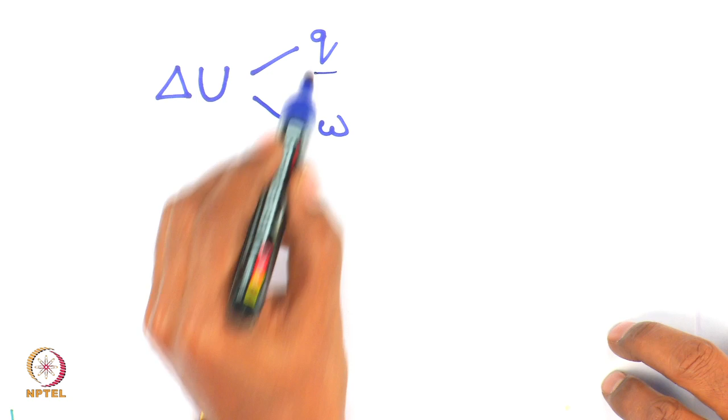It is like taking an example of, let us say, if we consider Q and W as 500 rupees currency note or 1000 rupees currency note, and we go to a bank and deposit, the statement that we get is the total amount deposited in the bank, irrespective of whether you have deposited 500 rupees notes or 1000 rupees notes or 2000 rupees notes. So, in the same way, the system is blind to whether the energy is flowing in the form of heat or work, but it is leading to change in internal energy of the system.

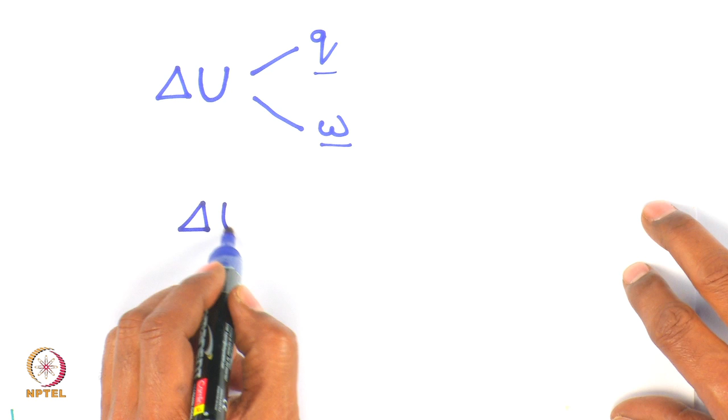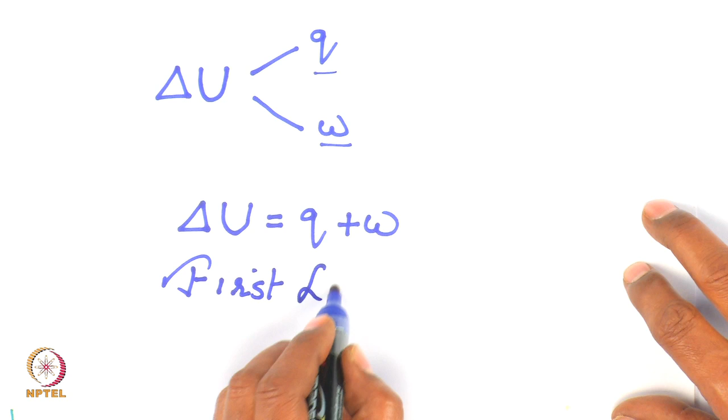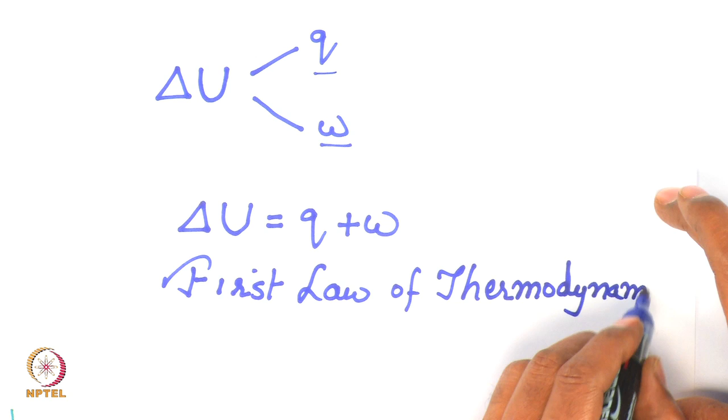So, if I write in a formal way, delta U is equal to Q plus W. This is the formal statement of the first law of thermodynamics. This is a mathematical statement of the first law of thermodynamics. And as we will see, this is a very useful mathematical equation.

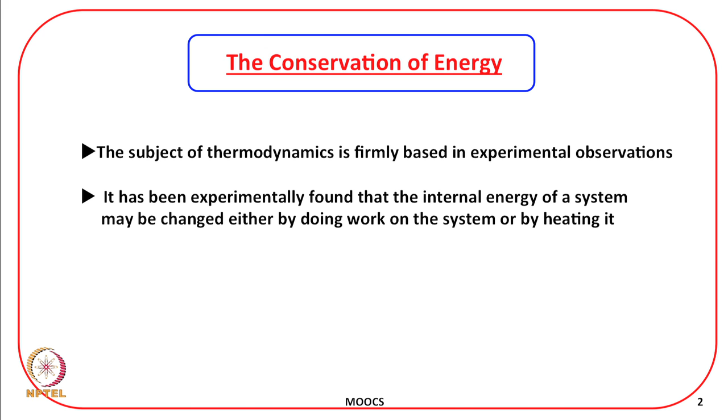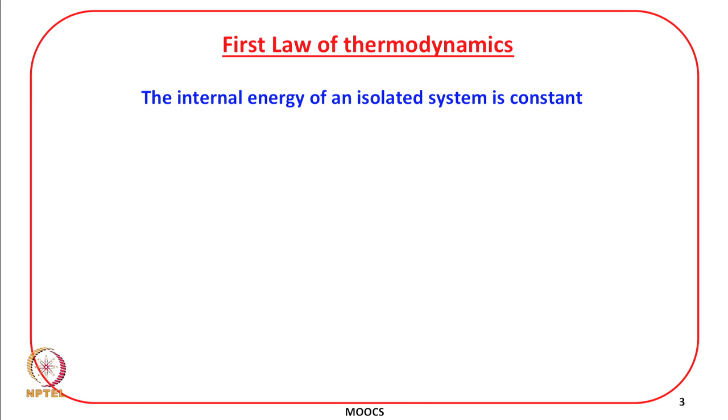And then, as we discussed in the previous lecture, we can express the internal energy changes as well as the heat in the form of work. And that is what I mentioned, that work is the most fundamental quantity in thermodynamics. And today I will demonstrate that we can express the change in internal energy exclusively in terms of work and the heat also in terms of work.

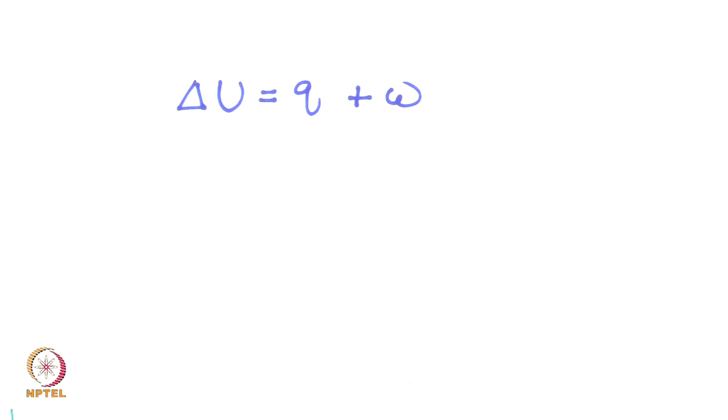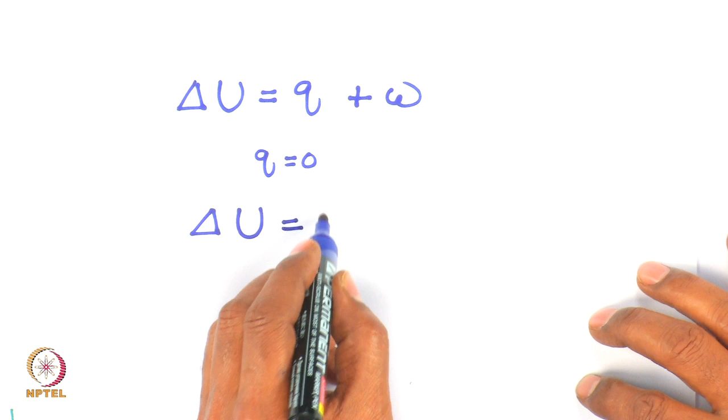So, the equation that we just derived is delta U is equal to Q plus W. And let me consider a process which is adiabatic. Adiabatic process means Q is equal to 0. So, I will write now delta U is equal to W adiabatic.

Remember that we have discussed that work is a path function, but see what we are doing here is we are connecting a path function with a property which is a state function. A path function is becoming equal to the difference in a property which is a state function. That means, according to this equation, the work done in changing a system from one specified state to another specified state under adiabatic condition is going to be the same irrespective of how the work is done.

Let us take an example. Let us say I take 5 kg of water and we need to change the temperature of water by some amount. And if we keep adiabatic conditions, then the work required to change this temperature will be the same whether this work is done in a mechanical form, that is by stirring it with the paddles, or by passing an electric current. The same amount of work will be required.

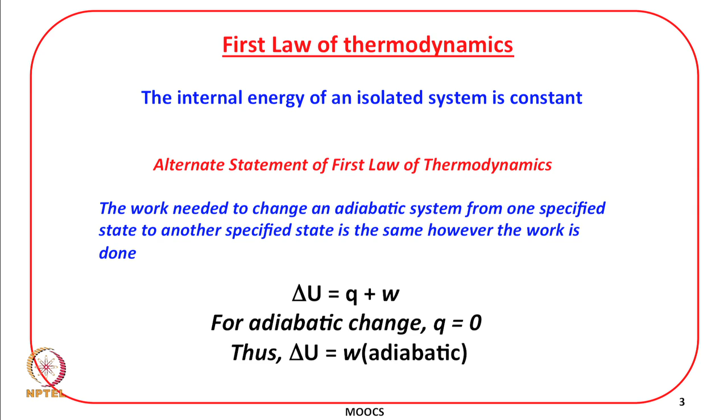You remember that earlier I discussed that work is said to be done in a process if that process can lead to change in height of a weight somewhere in the surrounding. So, that we can actually see with our eyes. Now, after having demonstrated this connection between delta U and W, I will demonstrate that we can also express heat exclusively in terms of work.

Here we have taken an example of an insulated system, that is, one which does not allow the transfer of heat, as forming the adiabatic process. Now, let us assume that we just remove the insulation, and once we remove the insulation, if the work is done on the system, then some of that work energy can leave the system in some form of energy, and we usually call that energy heat.

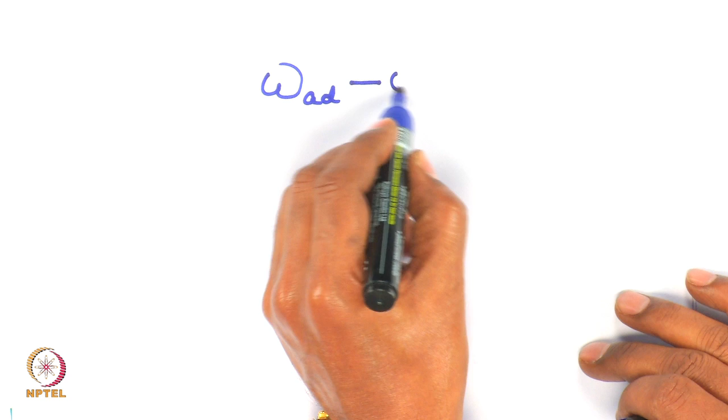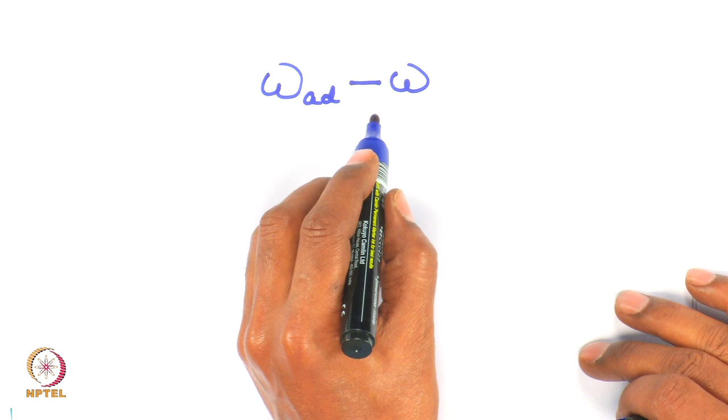So, therefore, earlier we had work under adiabatic conditions, and now if we remove the insulation, let us say the new work is W. To get the same change, this difference in the work is equal to the energy that has left the system, and that energy is heat.

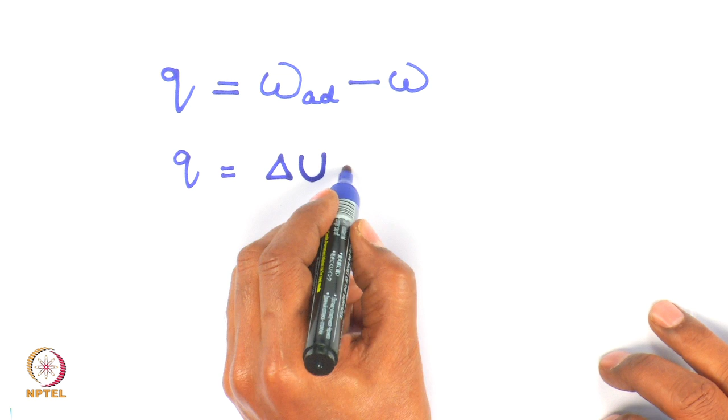Because now the system is not adiabatic, insulation is not there, therefore some amount of the work done on the system can actually leave the system in the form of some form of energy which is called heat. So, if the initial and final states are same, then this difference in the work done is equal to heat, and from the previous discussion, W adiabatic, we just discussed, is equal to delta U, and if I rearrange this I get the first law of thermodynamics back from an alternate discussion.

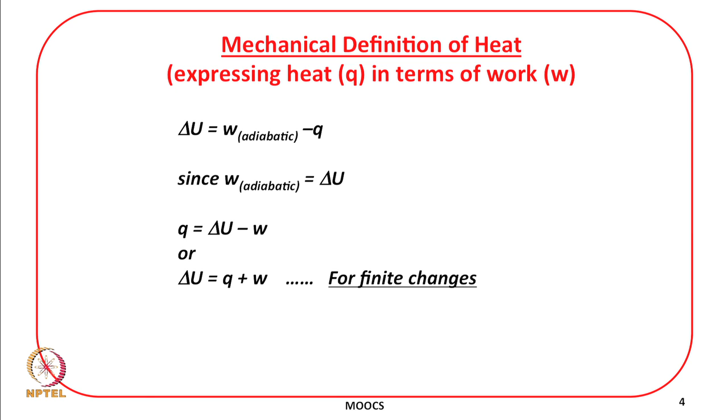Now, let us take a look at this slide. The delta U will be W adiabatic minus Q, and since W adiabatic is equal to delta U, therefore Q is equal to delta U minus W, or delta U is equal to Q plus W. This is what I just described, and this is for a finite change.

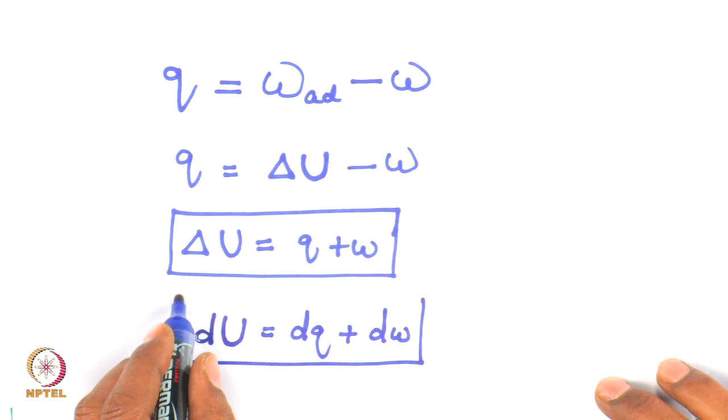Delta U is equal to Q plus W is for finite change, and for infinitesimally small changes I can simply write dU is equal to dq plus dw, and this is another equation which will be very useful when we deal with the infinitesimally small changes and then derive several other equations.

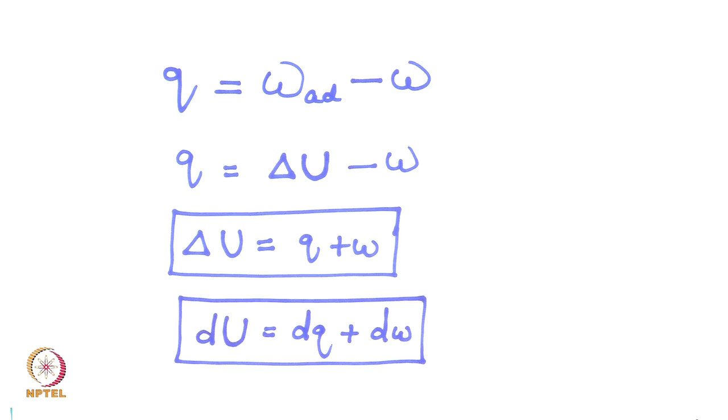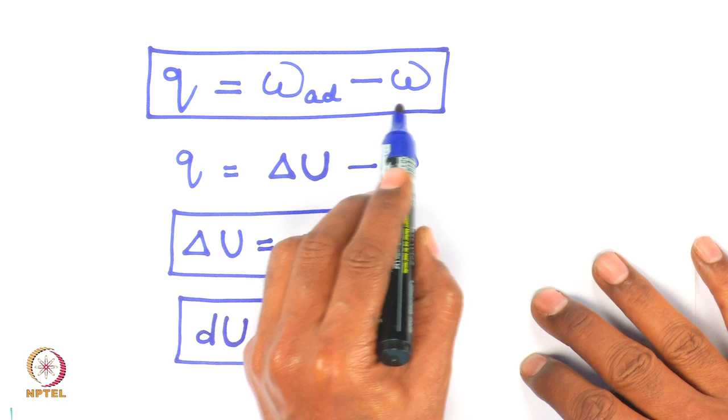But the point to recognize here is this equation, that we have demonstrated that we can express heat exclusively in terms of work. So, therefore, once again I re-emphasize that work is the most fundamental quantity. Both the internal energy, changes in internal energy, and heat can be expressed in terms of work.

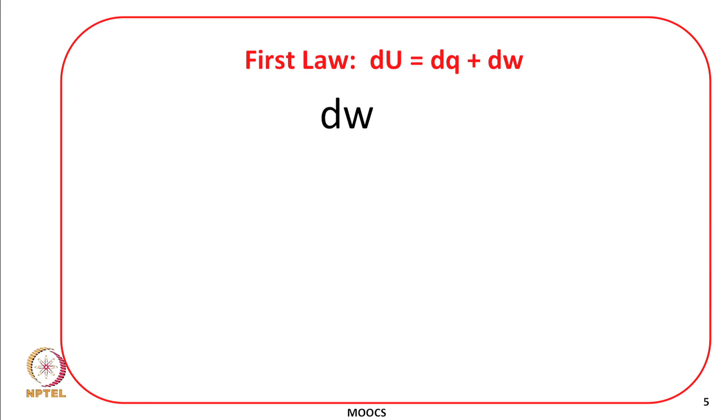Let us recall now the first law, dU is equal to dq plus dw, where dw represents the work done. The work done can be of two types. First one is the non pressure volume work, which in some books you will see they write as extra work. And the second type of work is the work of expansion, which is also called the pressure volume work.

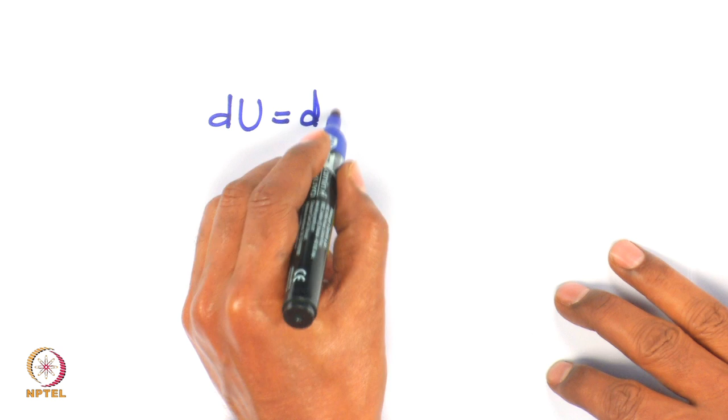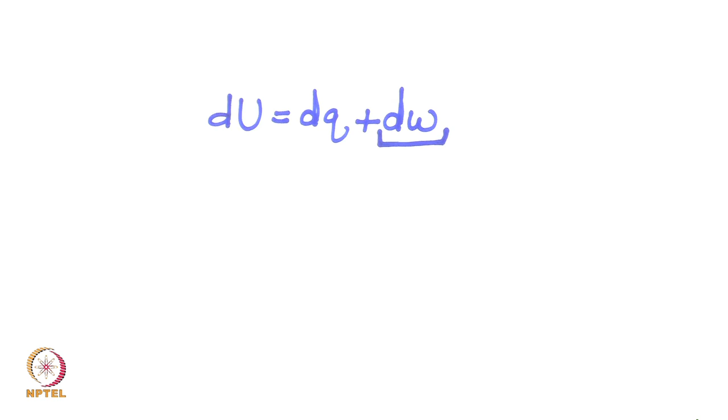Okay. Now, suppose we do not allow the system to do any extra work, if no non pressure volume work is done, and if the volume is held constant, that means there will be no pressure volume work done either. What I am trying to say is that we have dU is equal to dq plus dw, and if we do not draw any work from the system, that is, the system is not allowed to do any non pressure volume work or pressure volume work. Pressure volume work will be 0 when the volume is held constant,

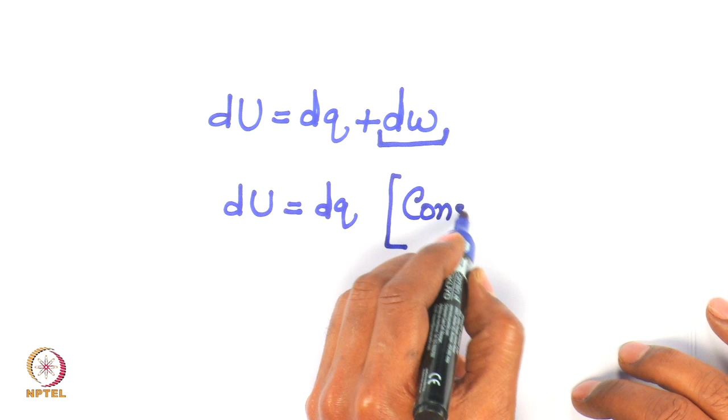and if there is also no extra work, then dU will become equal to dq, and what are the constraints? The constraints are constant volume, and the other is no extra work.

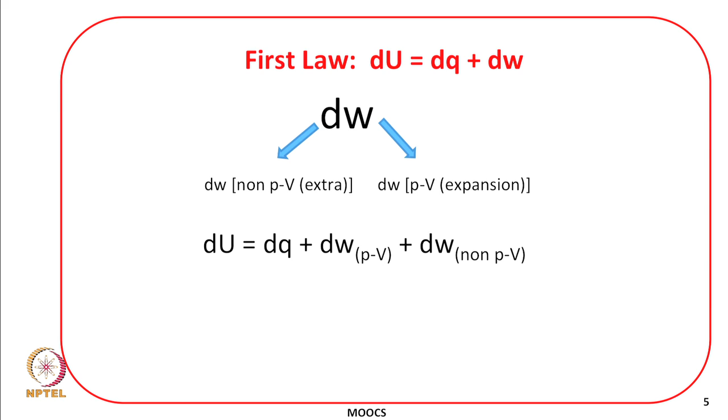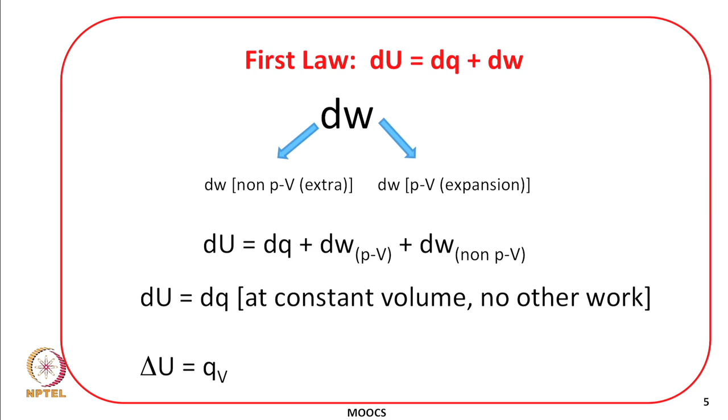So, let us now take a look at the slides. dU is equal to dq plus dw; as I mentioned before, it is pressure volume work or non pressure volume work, and in case there is no work done, whether of pressure volume or non pressure volume type, then dU is equal to dq. And for a finite change, what you need to do is just integrate, and you have delta U is equal to q_v.

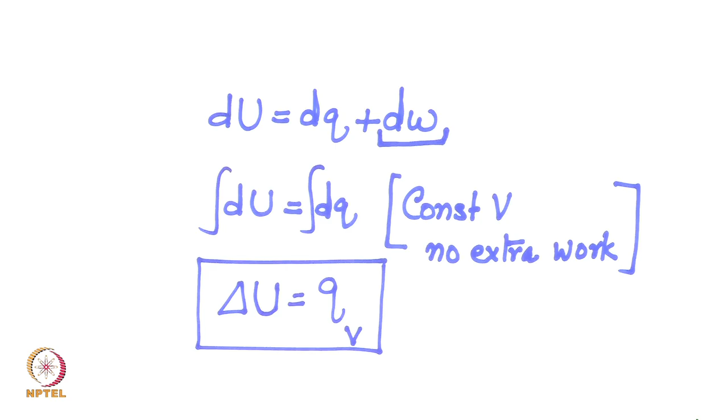The heat supplied to a system at constant volume is equal to change in its internal energy. So, experimentally, if we want to determine the change in internal energy, one way of finding it out is by measuring the heat supplied to the system, provided the volume is kept constant.

Now, let us discuss enthalpy. Suppose the volume is not held constant; you allow the system to expand or compress, let us say expansion. We can consider pressure constant, but let the volume change. Now, the amount of heat supplied is no more equal to change in its internal energy; it is a different quantity now, because some of the heat supplied can be used to drive back the surroundings.

And we will see here that if the pressure is held constant, then the amount of heat supplied turns out to be equal to change in enthalpy. Let us see how it comes.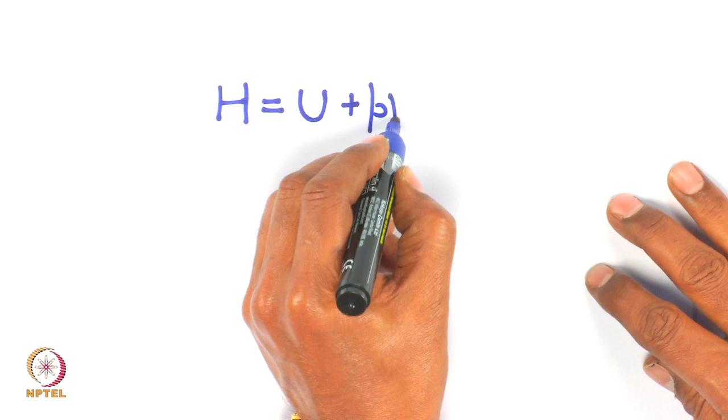How do we define enthalpy? It is a very common question asked in several interviews, and sometimes there is a confusion in the definition of enthalpy, and let us get rid of that confusion. Enthalpy, how do you define enthalpy? The definition of enthalpy is H is equal to U plus PV, where U is internal energy of the system, P is pressure of the system, and V is the volume of the system.

The confusion sometimes can come because of this PV term, because PV is equal to nRT is generally used for ideal gases. But remember here that this PV is a part of the definition. This definition applies to all the systems, irrespective of what is the state of the system. So, not to be confused with the ideal gases. The definition of enthalpy is H is equal to U plus PV.

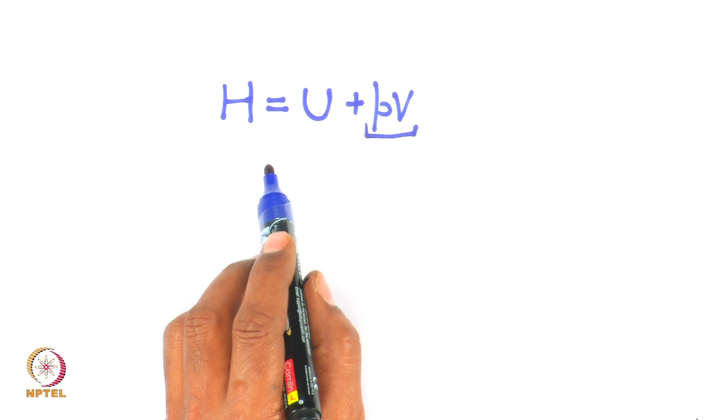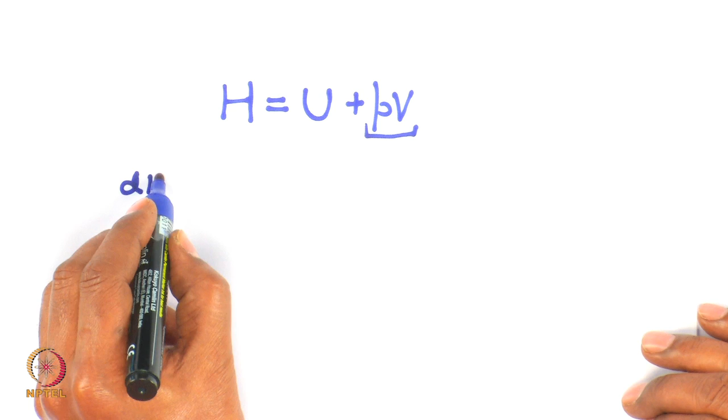All right. Now, let us say there is some advancement of the process. The change dH is going to be equal to dU plus PdV plus VdP. So, dH is equal to dU, which by first law is equal to dq plus dw. This comes from dU, then plus PdV plus VdP.

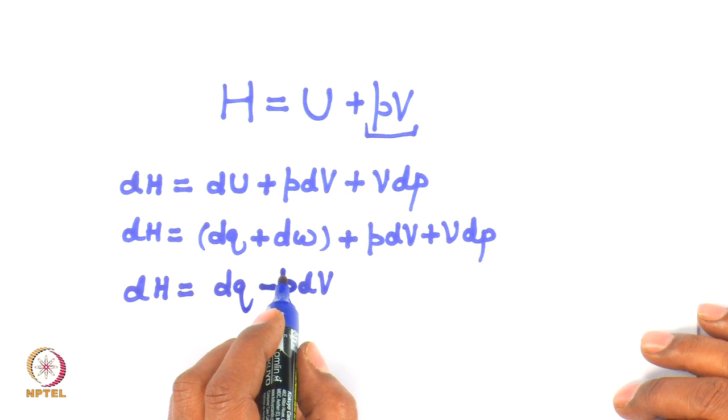Now, let us consider mechanical equilibrium between system and surrounding. If there is a mechanical equilibrium between system and surrounding, I can write dw as minus PdV, as we discussed in the previous lecture, that dw is equal to minus PdV in case there is a mechanical equilibrium between the system and surrounding, and also there is no other work done, that is non-pressure-volume work also is equal to 0.

So, in that case this equation becomes of this form, this and this cancel, and if pressure is held fixed, then dH becomes equal to dq at constant pressure, and also the condition is that there is no extra work or other work or whatever way you want to call it. And that is what is seen in the slide, that dH is equal to dq at constant pressure, no additional work. And for a finite change, when you integrate it, delta H is equal to Qp.

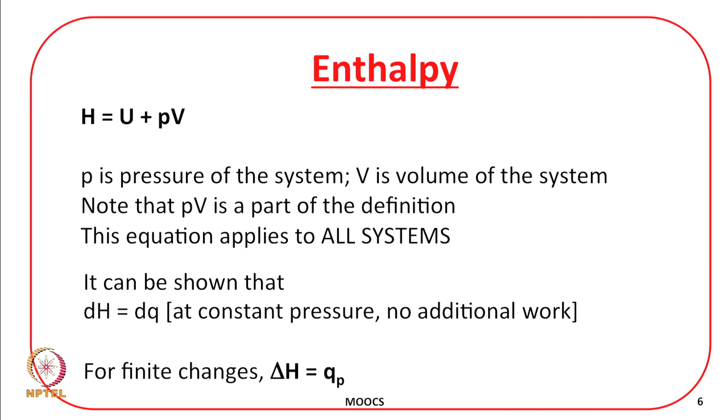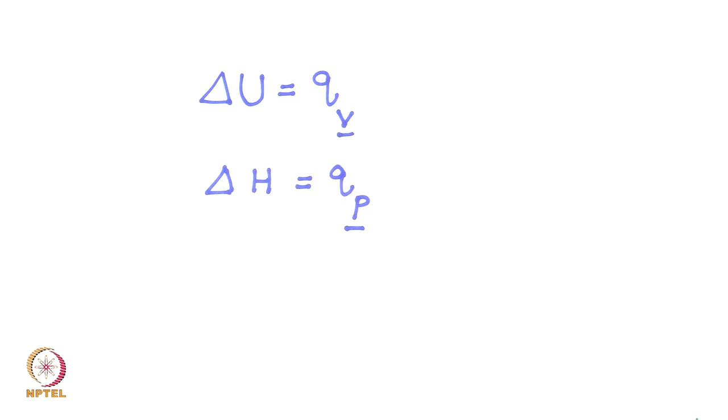Okay. So, the things to remember are that if we are interested in measuring delta U, this will be equal to qv, and delta H, this will be equal to qp. Here the volume is held constant, here the pressure is held constant, and in both the cases there is no additional work done. And later on we will discuss how to experimentally determine what kind of calorimeters are required to measure the values of delta U and the values of delta H.

Now we will discuss another very important thermodynamic quantity, and it is called the heat capacity. What is heat capacity? The definition of heat capacity is the amount of heat required to change the temperature of a system by 1 Kelvin. And obviously, if the temperature of the system is to be changed, it will definitely depend upon the conditions, that is whether the pressure is held constant or the volume is held constant. So, therefore, we will discuss two types of heat capacities.

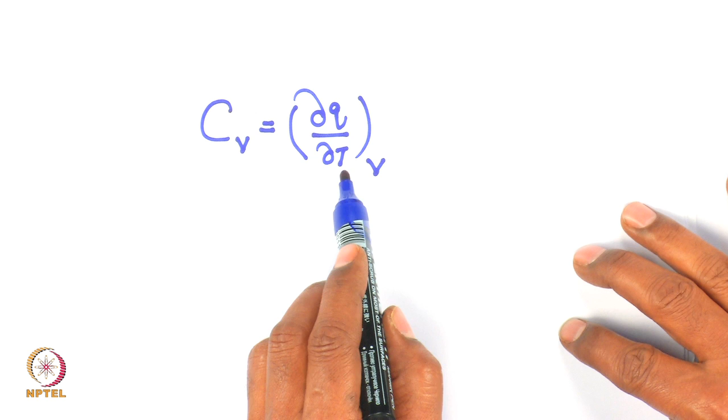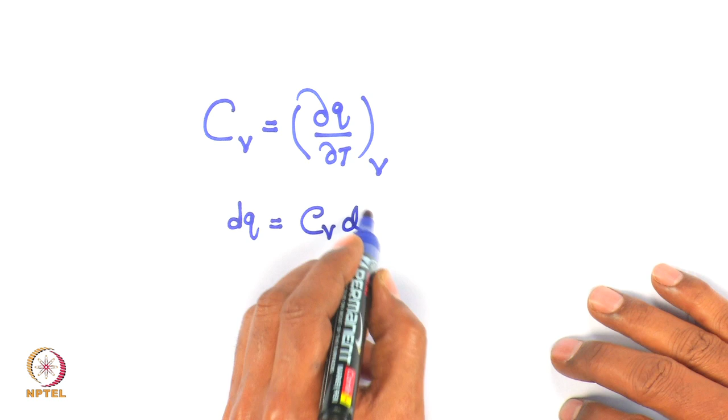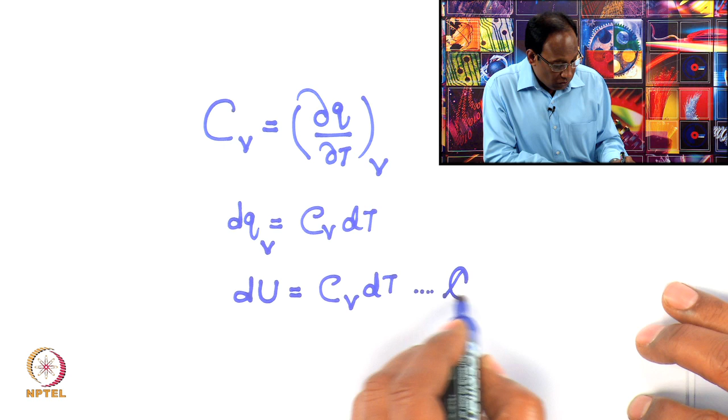One is the heat capacity at constant volume. The heat capacity at constant volume Cv is defined as the partial derivative ∂q/∂T at constant volume. The amount of heat required to change the temperature of a system by unit at constant volume. And from this equation, I can write that dq is equal to Cv dT at constant volume, and we have just shown that dq at constant volume is equal to dU is equal to Cv dT, and what is the constraint? You have constant volume.

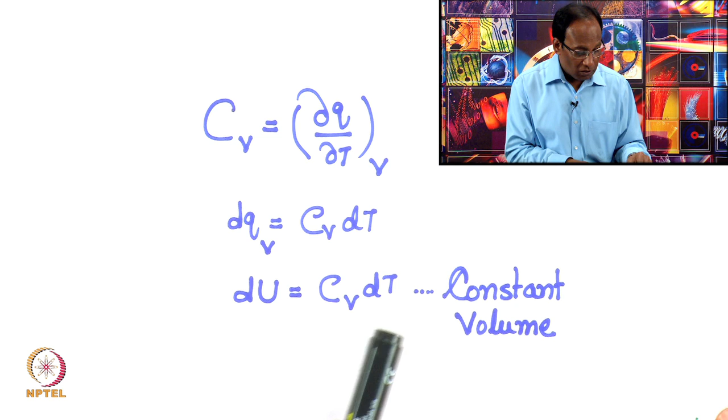If the volume is held constant and the temperature is changed, we can straight away use this equation dU is equal to Cv dT. However, as we will show later on, for a perfect gas, for an ideal gas, this equation always applies irrespective of whether the volume is held constant or not. That we will discuss later.

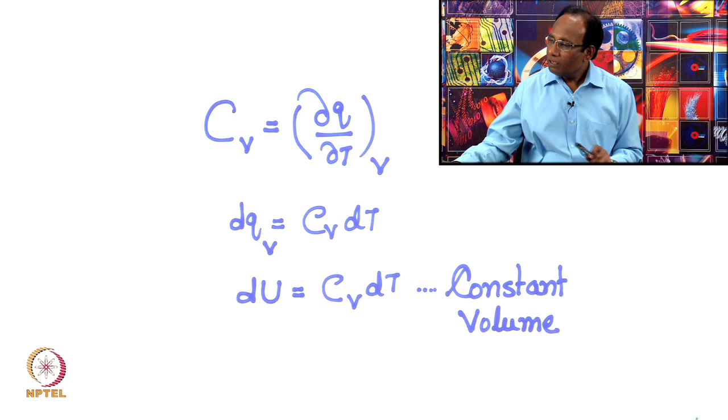Let us take a look at the slide. The heat capacity at constant volume is defined as Cv is equal to ∂U/∂T at constant volume, because dq at constant volume is equal to dU. Therefore, ∂q/∂T at constant volume becomes dU/dT, or ∂U/∂T at constant volume.

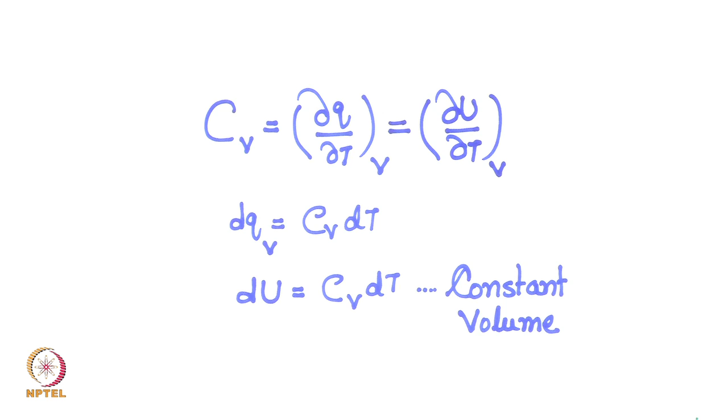Note that heat capacity, by definition, is a partial derivative. It is a partial derivative because one of the variables you are keeping constant, that is, volume is held constant. Heat capacity is an extensive property because the amount of heat required to change the temperature by unit degree will depend upon the size. However, if you calculate per mole, the molar heat capacity will become an intensive property because you will be defining it as per mole.

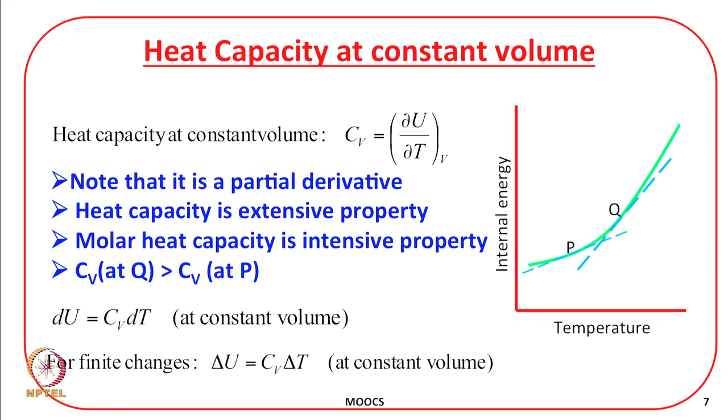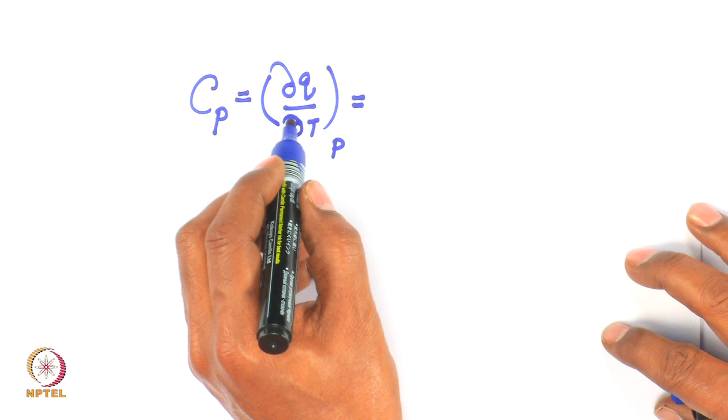Now, let us discuss the heat capacity at constant pressure. If the pressure is held constant, then definitely the amount of heat required to change the temperature by 1 degree will be different. And how do we define it? Cp, the heat capacity at constant pressure, is equal to ∂q/∂T at constant pressure, and since we just discussed that the heat at constant pressure is equal to the change in enthalpy, I will write this as ∂H/∂T at constant pressure.

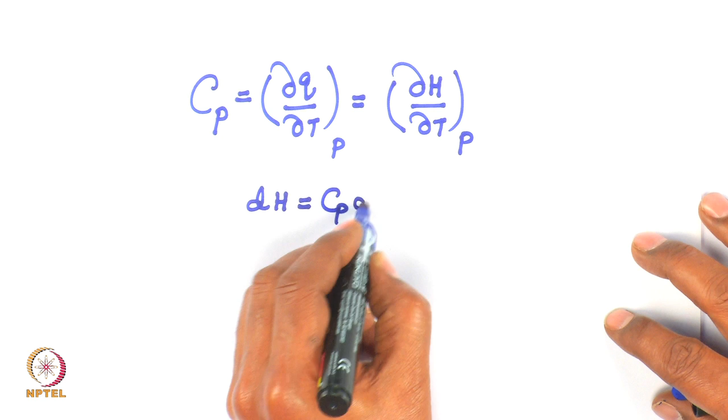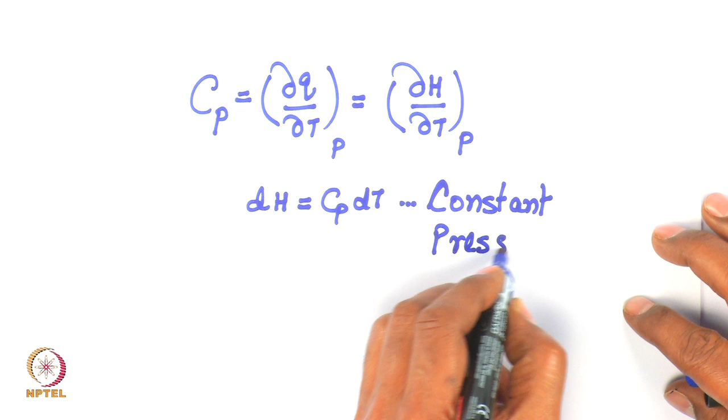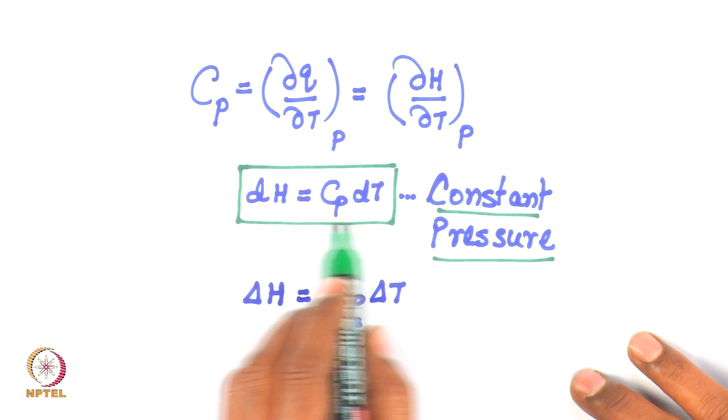Writing this in another form, dH is equal to Cp dT, again at constant pressure. And for a finite change, delta H is equal to Cp times delta T if Cp does not depend upon temperature; otherwise the temperature dependence has to be accounted for, which we will discuss later. So, here again this equation dH equals Cp dT at constant pressure is always applicable as long as you hold the pressure constant. However, we will demonstrate later that for a perfect gas this always holds true. You do not have to hold the pressure constant; this equation can be straight away used for a perfect gas.

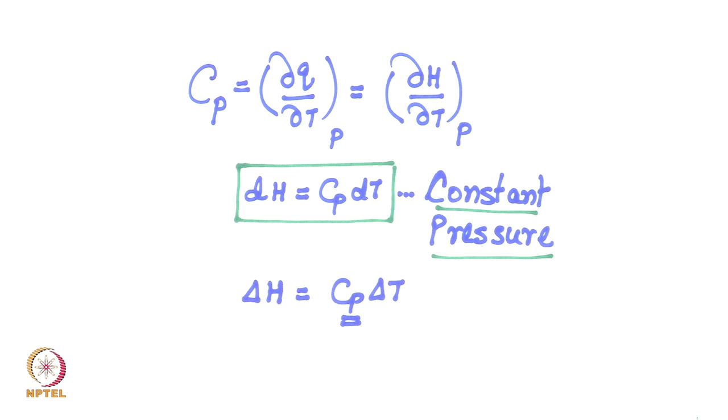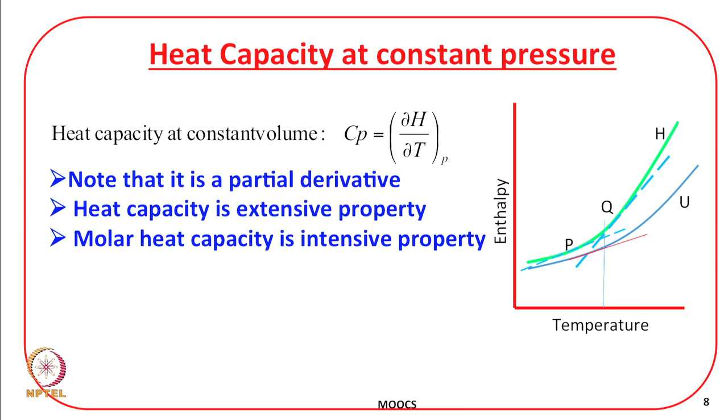Here again please note that it is a partial derivative, heat capacity is an extensive property, molar heat capacity is an intensive property, and the final point to note is that Cp is greater than Cv, because you can see at point P or point Q in the figure, the slopes are different, and the slope of the plot of H versus T is higher than the slope of U versus T. Therefore, Cp,m is greater than Cv,m.

What are the advantages of Cp and Cv? There are many applications of Cp and Cv. Let me first discuss the temperature dependence of reaction enthalpies. It is a very useful thermodynamic quantity which allows connecting one thermodynamic property to another at a different temperature without doing additional experiments.

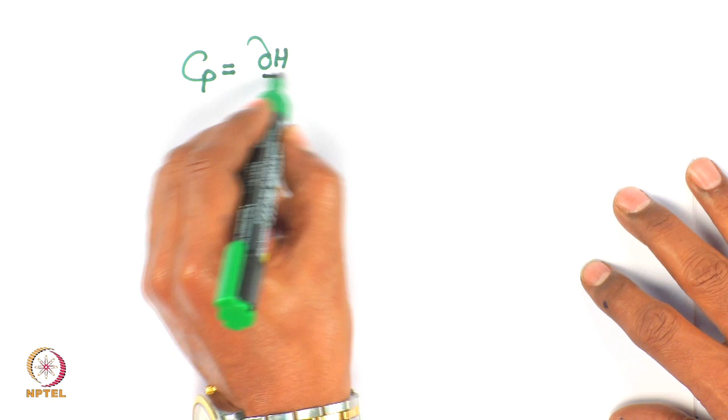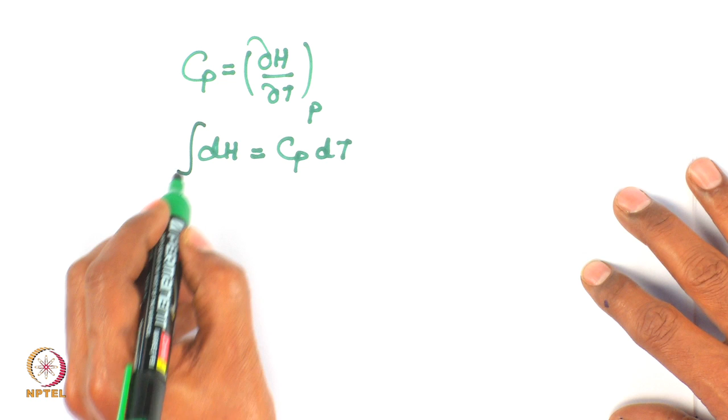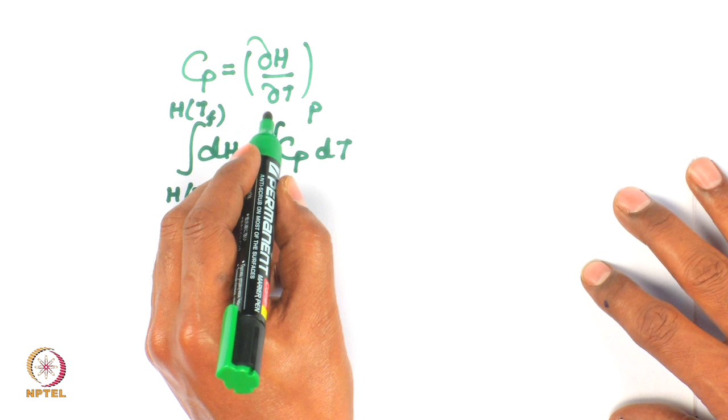So, look at this definition: Cp is equal to ∂H/∂T at constant pressure. So, dH is equal to Cp dT, assuming the pressure is constant. So, this is H at Ti, and let us say the final limit is H at Tf, integrating from Ti to Tf. So, H at Tf is equal to H at Ti plus the integral from Ti to Tf of Cp dT.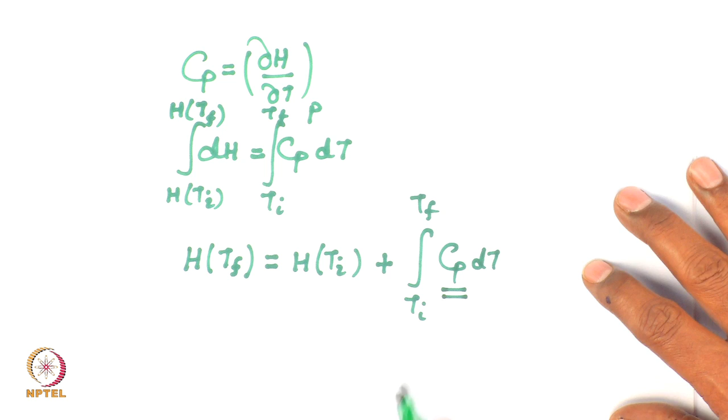Now, depending upon whether the heat capacity at constant pressure is temperature dependent or not, it can either be taken out of the integral or the appropriate expression can be used. Usually, Cp for a very narrow range of temperature can be considered temperature independent, and very safely and accurately so for an ideal gas. For a small range of temperature, Cp usually does not depend upon temperature, and in that case it can be taken out of the integral. In any case, if the temperature range is small, then to a fairly good level of accuracy, heat capacities can be considered independent of temperature. Otherwise, an appropriate equation should be used. Let us take a look at the slide.

In case the heat capacity is not independent of temperature, then a convenient expression, it is again an experimental observation, is that molar heat capacity Cpm usually varies with temperature according to A plus B T plus C by T square, where A, B and C are empirical constants.

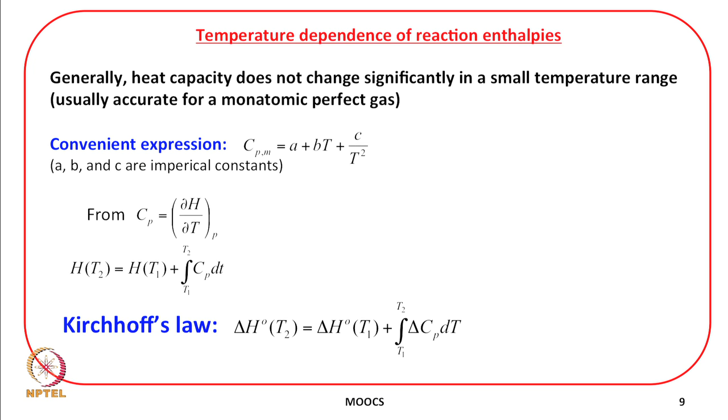So, finally, as I said, Cp and Cv are very important thermodynamic quantities. How do we generally interpret heat capacity? The general definition is the amount of heat required to change the temperature by 1 Kelvin. And if we think a little bit deeper, the amount of heat required to change the temperature of a system will definitely depend upon the type of system. It will depend upon the structural rigidity of the system, because if the system is very rigid, if there is a very strong bonding in a particular substance, then to raise the temperature by 1 Kelvin, a lot of heat will be required. So, I can write in general that Cp of a rigid system will be higher than the Cp of a soft system.

In the design of materials, for example, Cp or Cv, which is defined as dou Q by dou T at constant pressure. If upon supplying the heat, the change in temperature is very little, then the heat capacity is very high. If what we want is some material which should not respond to heat supplied to it in terms of large changes in temperature, then you want a high heat capacity material. That is, in that case, the heat supplied will not lead to reasonable changes in temperature.

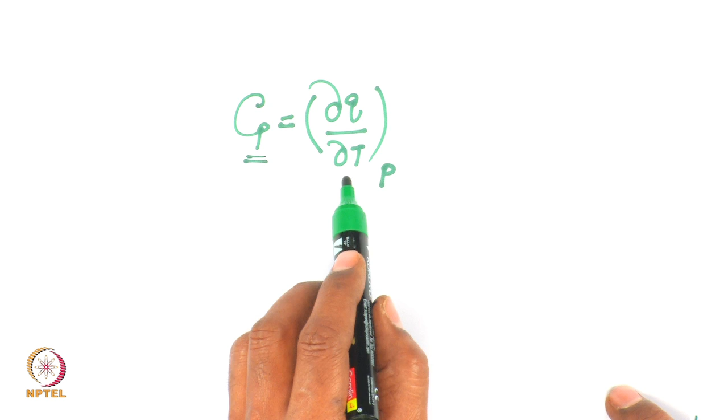However, for heat capacity to be very low, the amount of heat supplied will lead to larger changes in temperature. So, if we want a system which should immediately respond to the heat, a small application of heat should lead to a large change in the temperature of the system to which the heat is supplied, then the heat capacity is going to be very low.

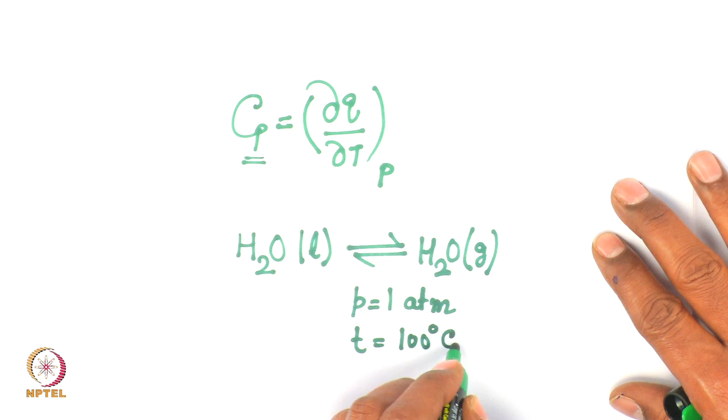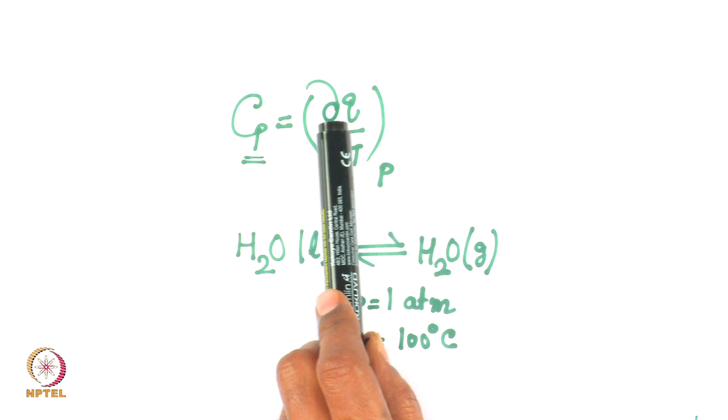Phase transitions. Again, if we look at this definition, a phase transition can be, let us say, if I just took liquid water to water vapor at 100 degrees Celsius and 1 atmosphere. Let us say P is equal to 1 atmosphere and temperature is equal to 100 degrees Celsius. This is a phase transition. At phase transition, the heat capacity becomes infinite, because whatever heat is supplied to the system at phase transition is used to drive the endothermic phase transition. It does not change the temperature. That is why phase transitions are accompanied with infinite heat capacity values.

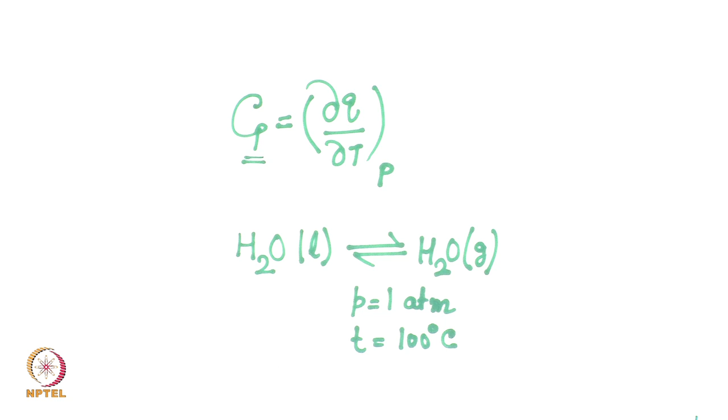And another important piece of information that comes out of these values of heat capacities is on intermolecular interactions. A detailed discussion will require a long time, but to explain very briefly, any structural rearrangements as a result of intermolecular interactions should be reflected in the values of Cp and Cv, because after all Cp and Cv depend upon the rigidity of the system, the nature of bonding, and if the intermolecular interactions are leading to alteration in the nature of interactions, nature of bonding, then Cp and Cv should respond to it.

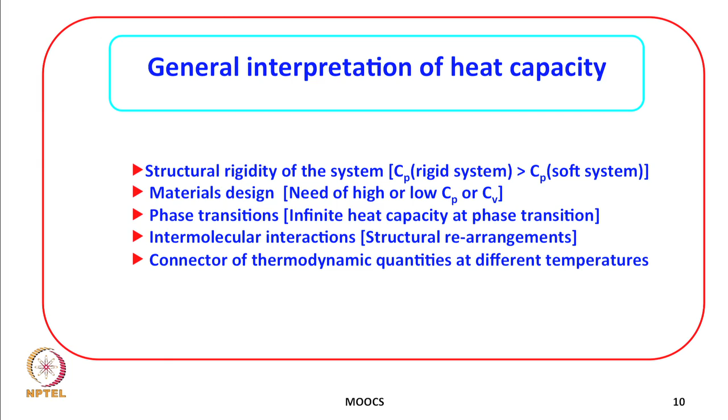So, therefore, Cp and Cv are very important thermodynamic quantities which can be used to get a lot of information and which have a lot of applications. And as I just discussed as one example using Kirchhoff's equation, it is a connector of thermodynamic quantities at different temperatures. So, I hope that the first law of thermodynamics, which describes the changes in internal energy in terms of heat and work, is very clear, and the various equations which we developed have a lot of applications which we will discuss in the tutorial session.